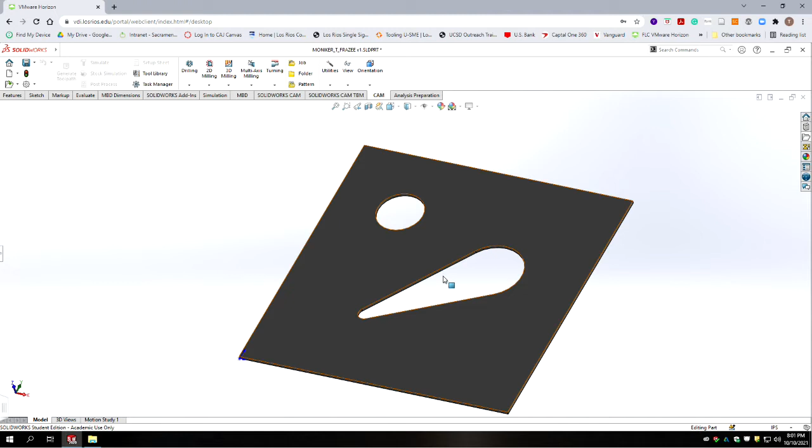All we're going to do is cut the interior features. I realize your part's going to look different than mine. We're doing this project on a water jet, and we actually have to do something in this software.

HSM doesn't include the water jet, plasma, and laser package in the version that runs in SolidWorks. That was news to me. I thought it was available for all three platforms, Fusion 360 and Inventor. Apparently it's available in Fusion 360 and Inventor. So if you want to use a tool that's more set up to do those types of operations, I've also included a Fusion 360 version of this tutorial, but that'll require you to download Fusion 360 and establish an account.

All the other functions appear to be in HSM, so the rest of the semester we'll be using HSM. From what I gather, if you have a laser, water jet, or plasma cutter, you use the milling portion of HSM in SolidWorks, and then you have to tune a custom post processor to output the code in the way your machine reads it.

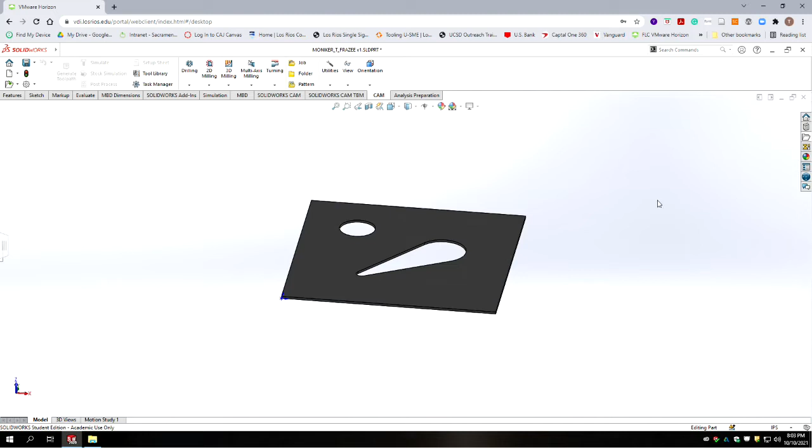Okay, so we're going to expand out our MONIKER plate here, and we want to be in the CAM tab. We're going to go to the tab here and say job. We're going to create a new job, and the milling type's going to be milling.

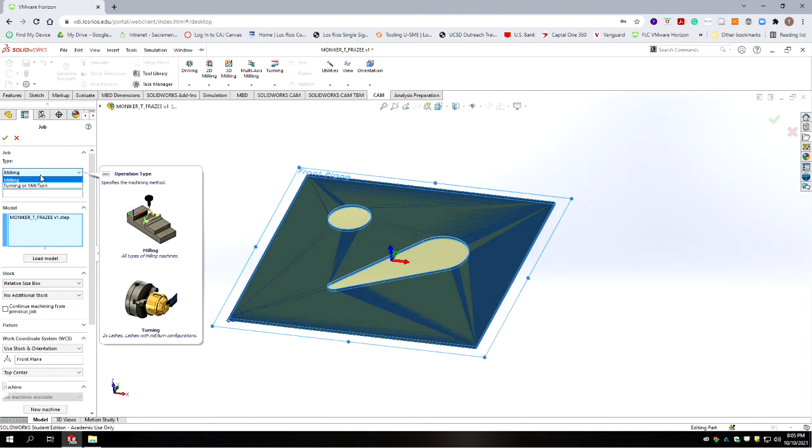If this was Fusion 360 or Inventor, you'd have a third option. It would say cutting, and we're going to call this our MONIKER plate.

And we have the model loaded, and it's asking how are we going to make stock. Relative size box, but we're not going to add additional stock. So it's trying to size up the volume of the model and determine what stock is. In this case, we're just going to use the 12 by 12 plate, and all the work we do will remove material from within that. So we don't need to add any additional stock.

We're not going to add a fixture, and we're going to use a different orientation than what we have shown, and we don't want our stock orientation to be in the center top of the part.

What we're going to do is change this to use a Z axis and an X axis reference. So our Z axis is going to be the top of the part, and our X axis is going to be a horizontal line on the part. In my case, the gnome didn't change.

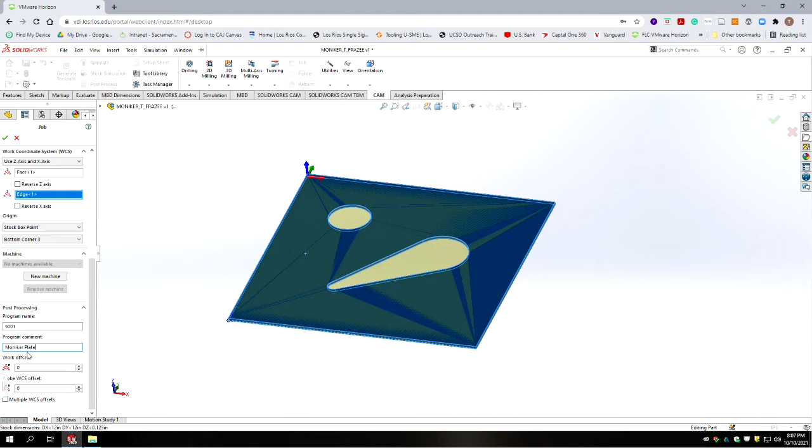We're going to accept that job, and now we have that set up. Now if we scroll all the way to the right on these tabs, there's 3 of them that look similar. These first 2 are for CAMWorks. This last one is for HSM.

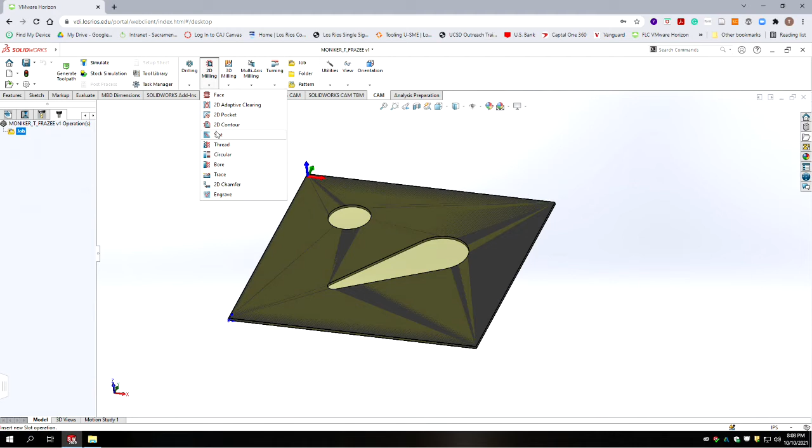So we're going to select on that. It's a menu tree specific to HSM. Here's the job we've created. We need to highlight that job, and now we're going to create operations. So we're going to go to 2D milling, 2D contour, and we're going to go to our library.

Okay, we're going to right click and add a library folder. You want to make sure you save that in your H drive, otherwise the next time you come to work on this, it won't be here. In my case, it's going to my documents, my libraries, but you want to make sure you create this folder in your H drive.

Okay, so this is going to be S60, the library. This new S60 folder, you need to make it in your H drive so that everything we create stays in that library.

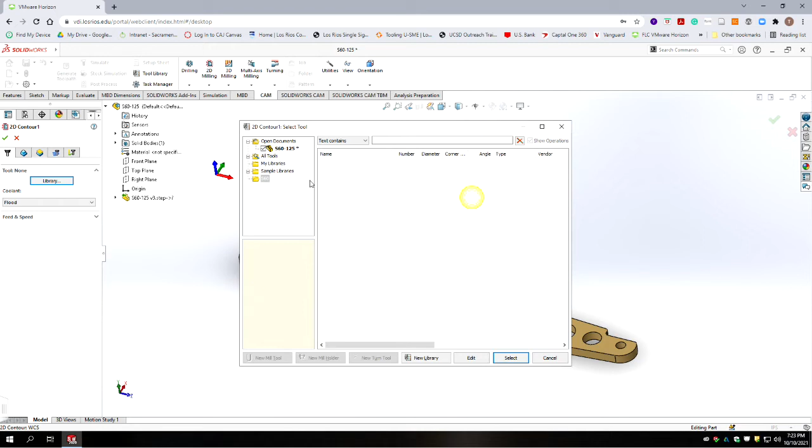So what we're going to do is create a new library, and this is going to be our S60. We're going to make a new milling tool. Remember, we're going to fool HSM that this is actually a water jet. So it's going to be tool number 1, length offset 1, diameter offset 1. Just leave that all at default. We want it to be a live tool, which means it spins. In this case, it's not spinning, but it's going to put a pressure in instead of an RPM. And we're going to call this the Wazer

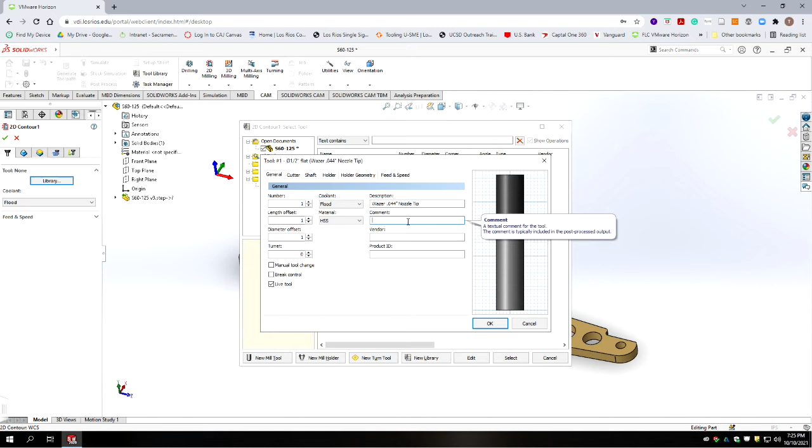.044 inch nozzle tip. We're going to say Wazer, the vendor is Wazer. And if you had a website, you could put the product information on there for that actual tip.

Okay, so now we're going to go to the cutter, and we need to match it to that. So we said it was a 44 thousandths kerf, so our diameter is 0.044.

We're going to put in some kind of bogus information, but we're going to say the overall length is 2 inches, and the body length is 1 inch. We'll say the flute length is 0.25, and our shoulder length will be 0.75.

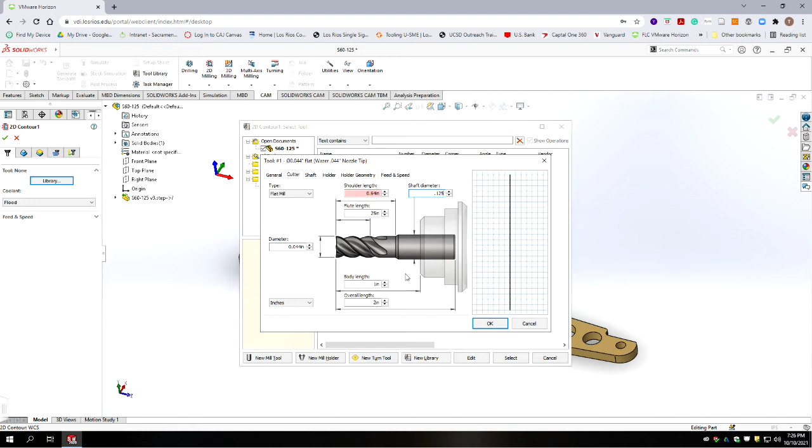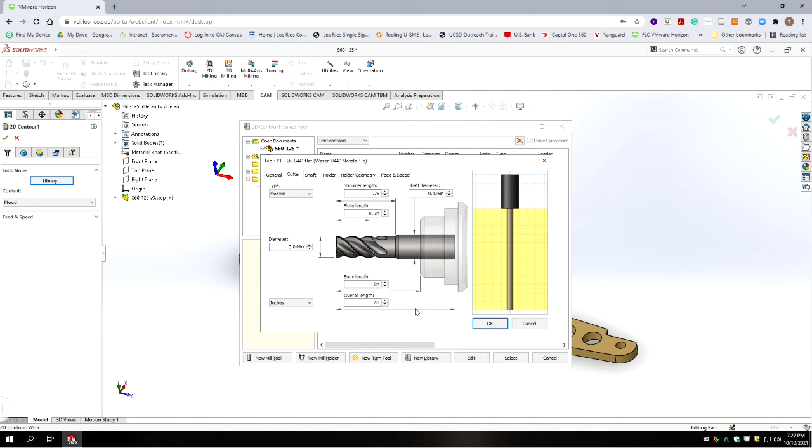We'll put a shaft diameter, which there really isn't a shaft on this, but we'll set it at 1/8 inch, and our shoulder length at 0.75. So graphically, we're going to see this thing like this. What's really going to output on the machine is that the end of that tip is actually going to be a stream, high pressure stream of water. Okay, we're going to hit OK, and that's our simulated Wazer tip.

Now that we have that tool made, we can select it from the menu. And we're going to ignore all the feeds and speeds in this case, again, they're going to output as pressures, not RPMs and feed rates.

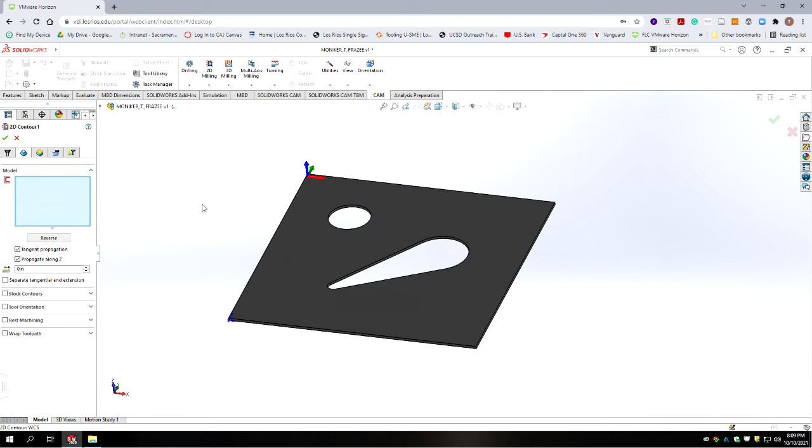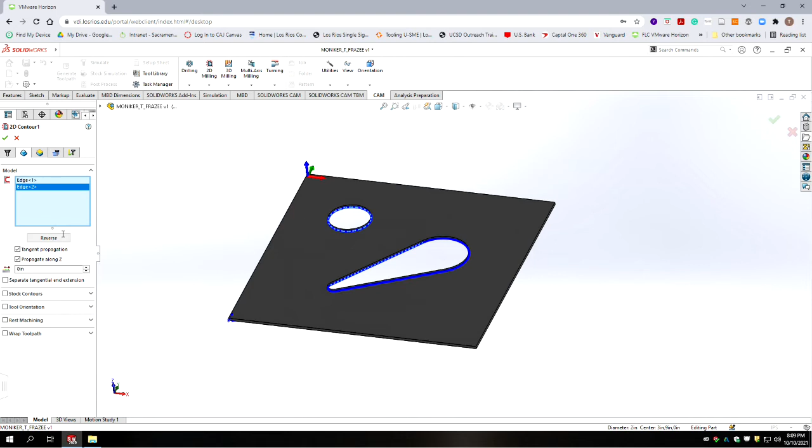We're going to go over to what features on the model we're going to machine. So we're going to select the bottom edge of the circle, the bottom edge of my ice cream cone shape there. Now you may have more features than I do, so you may need to select more items. We're not going to cut the outside periphery because that's already cut, 12 by 12. And we are going to leave all the rest of these at default.

We're going to go to heights. These are different planes that denote different levels. So there's zones, which changes how the behavior of the cutter is.

So the clearance height is usually a plane that's above any clamps. It's calculating that the clearance height is 400 thousandths from the retract height. If you go to the next box, the retract height, which that number is based off of, is 200 thousandths from the top of the stock. That's an area where when you're down within the work, it's going to retract to do local work, but it's not going to pull all the way up to avoid a clamp.

And then we have our feed height, which can be this, in this instance is the same. That is where it's going to move from rapid, which is as fast as the machine can move, to a known feed rate. And so that's 200 thousandths also from the top of the stock.

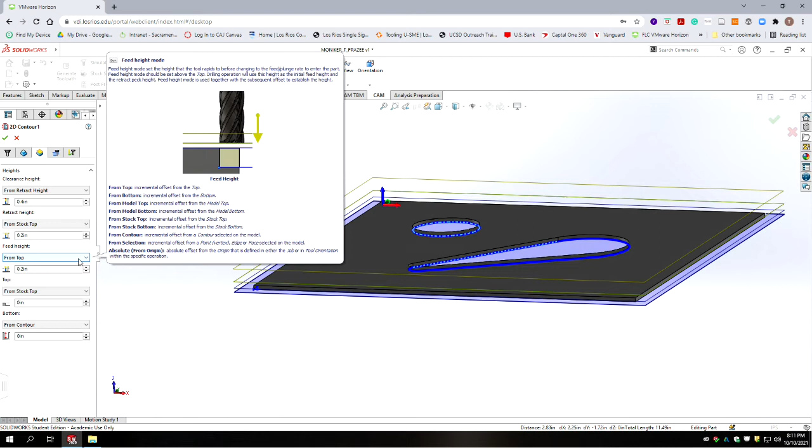It's from the top, and the top is set as the top of the stock, which it is. Our bottom cut is to the contours we selected, so it's going to cut all the way through to that layer.

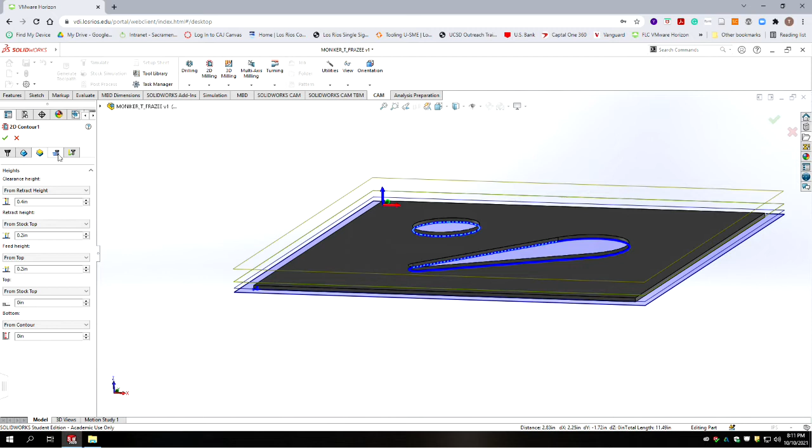We go to the next tab, we're going to do 2D contour. The compensation is going to be in the computer, and we're going to take all the rest of these on default, except we're going to check one called smoothing. What that does is on curvatures, it makes a tighter tolerance, so you get a smoother contour.

Now we're going to go to the last tab, which is linking, and we're going to leave the top stuff at default. You want to keep the tool down so that it doesn't have to pull up when it's within 2 inches of the last cut. And then we're going to set these lead-in and entries.

So we're going to put in a lead-in radius of 0.06 and 90 degrees. Our extension is going to be 0.06 and perpendicular to the path, and we're going to set the vertical radius to 0.

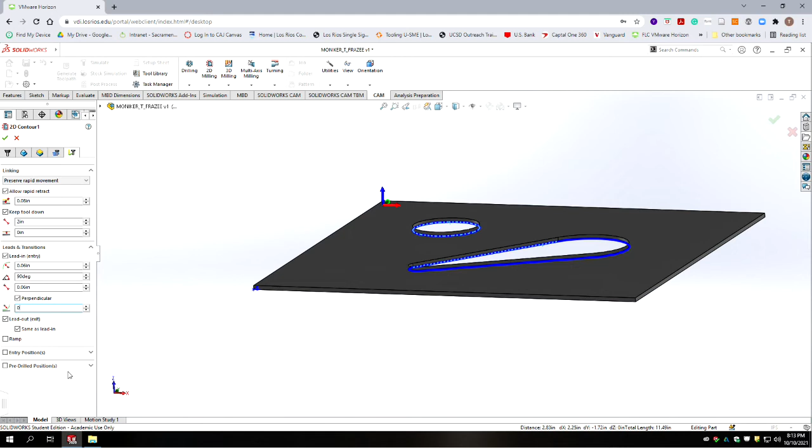Now, if you have features that are a lot smaller than mine, these settings may not work for you. It may cut partially and not cut all your features, so you may need to reduce those numbers I just plugged in related to the leads and transitions. Okay, we're all set. We're going to hit the accept button and we generated our toolpath.

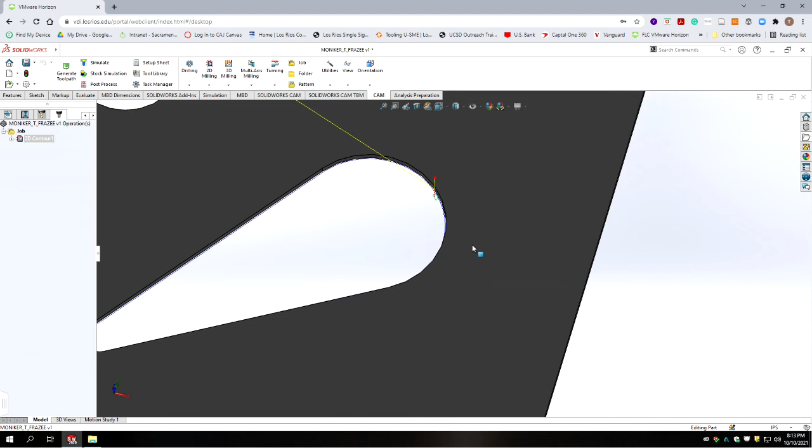Now I zoom in, and it looks like we have a problem here. Our cutter path is on the inside of one, but it appears that it may be on the outside of the other, so this hole is going to end up being too big. What to do?

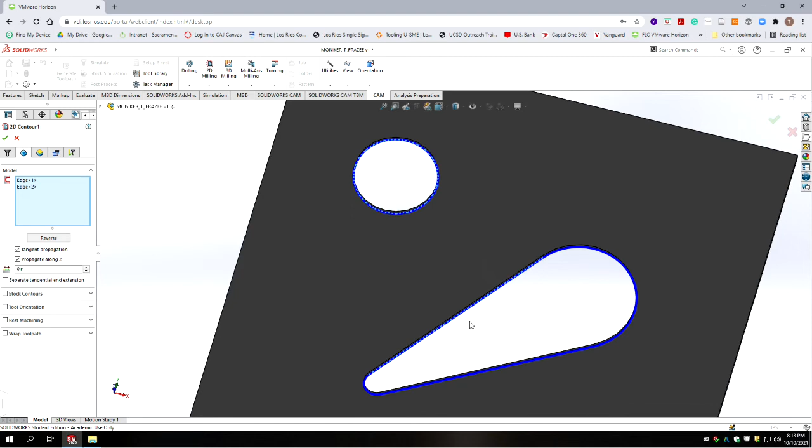Well, let's go back and check our geometry selection. If I go back to geometry and look at what I selected, and then select reverse, it's going to default to selecting the first entity, and as you can see, it flipped the side that entity was cutting to. Next we're going to do a cool feature called stock simulation, which is going to simulate the cutting.

So we hit play, and it actually shows the cutter moving through the material, simulating the stock. We're moving around, and it's giving the toolpath coordinates in the lower left corner. And we're cutting out the ice cream cone shape.

And then it's going to pick up and rapid, turning the water jet off over the circle. It'll come to, pierce, ramp in, cut the full diameter, and ramp back out with a radius. There we go, we're going to exit this.

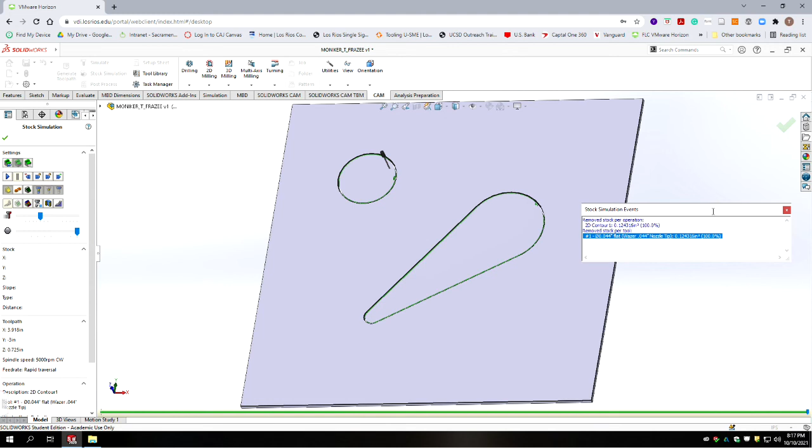Okay, now that we've simulated, we need to make sure we save. And now we're going to post-process.

So you need to highlight the entire job. We're going to select post-process, and we're going to select - first you need to go to setup up here, and you're going to pick on the little box.

Pick on setup, and we're going to use the installed post libraries. You're going to select that option, and then we're going to select Fanuc, or Fanuc, depending on how you want to pronounce it. It's a well-known control manufacturer.

And then you want to make sure that your output folder is going somewhere where you can find it, so it should be your H drive. If it doesn't show that, change this directory to where your H drive is, because you're going to be looking for an output file with the .nc extension.

Okay, we've got our program number and name as if we typed it in before. If this box says automatic, change it to inches, and make sure this box is checked to open an NC file in editor, so it'll come up on the screen when it's done post-processing, and you'll actually see the code.

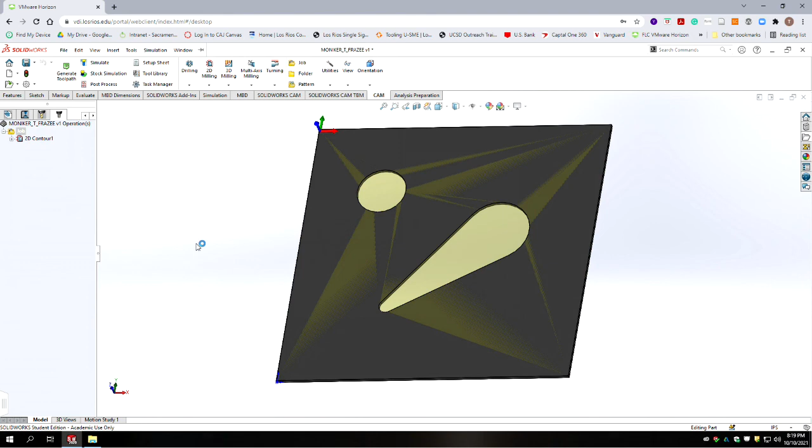So I'm going to hit post. I'm going to accept my location here. Okay, and then this is the actual code file that was output by your programming.

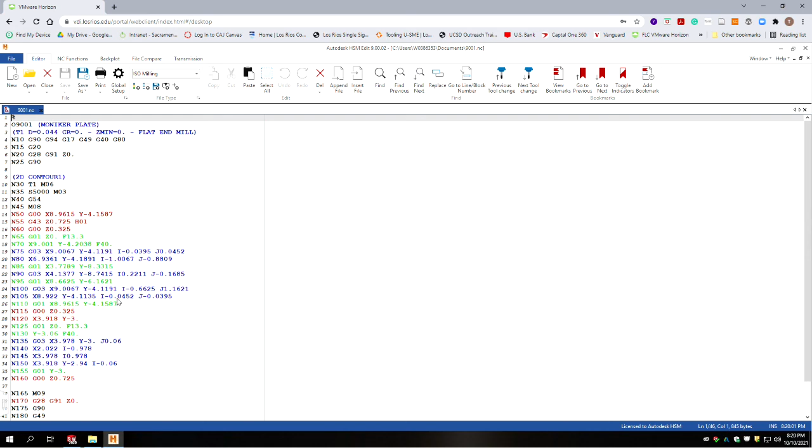Okay, so we have our 2D contour. It's called MONIKER plate. We've got a bunch of code, and it's just one contour, so pretty quick.

So we can close this, and you're going to upload the file that says 9001. That's going to be uploaded in your MONIKER assignment.